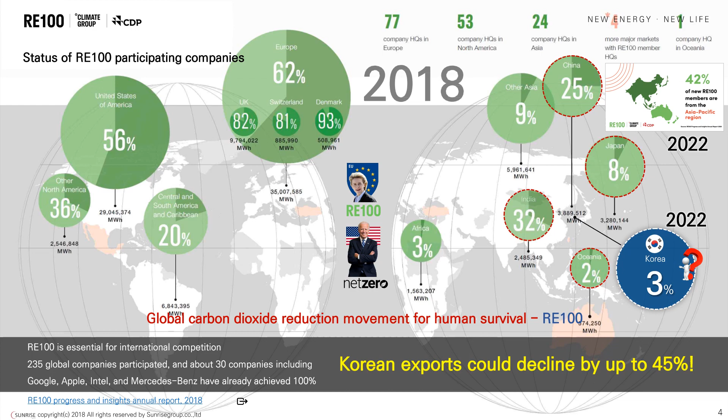Now, let's take a moment to look at hydrogen, a key energy transition keyword for RE100 implementation. Hydrogen is broadly classified into 4 categories: gray, blue, green, and white hydrogen.

Gray hydrogen emits carbon dioxide but produces hydrogen most easily and cheaply using natural gas. Blue hydrogen captures some of the carbon dioxide generated during the gray hydrogen production process and buries it underground or in the seabed.

Green hydrogen is produced by electrolysis of water using renewable energy such as solar or wind power, without carbon dioxide emissions. Lastly, there is white hydrogen, which produces a new type of energy or self-sustaining power without using renewable energy, electrolyzing water, or capturing hydrogen naturally existing underground.

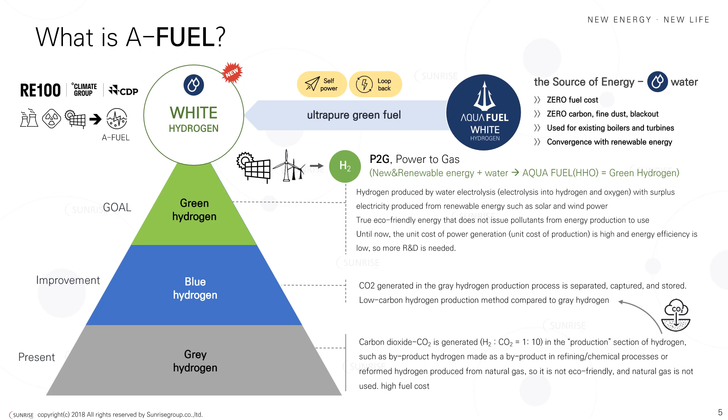Among these, green hydrogen and white hydrogen are internationally recognized as eco-friendly hydrogen. The fuel produced by our company is this white hydrogen. These two types of hydrogen have something in common: they produce hydrogen by electrolyzing water, without emitting carbon dioxide.

Changing fuel is the key to energy transition. Until now, mankind has used hydrocarbons, called fossil fuels. When burning hydrocarbons, that is, fossil fuels containing carbon, carbon dioxide is inevitably emitted. We need to change from hydrocarbons that emit carbon dioxide, a greenhouse gas, to carbon-free fuels.

One of the most carbon-free fuels is water. Water is hydrogen oxide with oxygen instead of carbon. Water becomes fuel when decomposed, and is the most ideal energy source as it is reduced back to water after use. Water is not only the most abundant resource on Earth, but is also an infinite and clean natural energy source with no fear of resource depletion, due to its property of being converted back to water after being used as fuel.

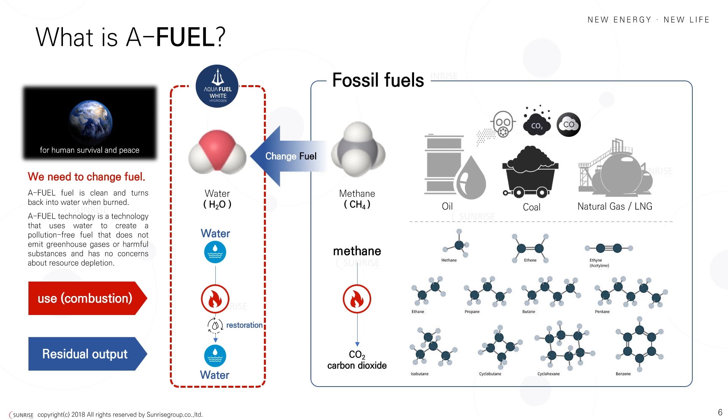However, because the cost of electricity to electrolyze water was high, people were reluctant to do so for economic reasons. Our company helps you make a quick and economical energy transition by providing solutions that minimize the electricity cost of electrolyzing water and the fuel conversion cost.

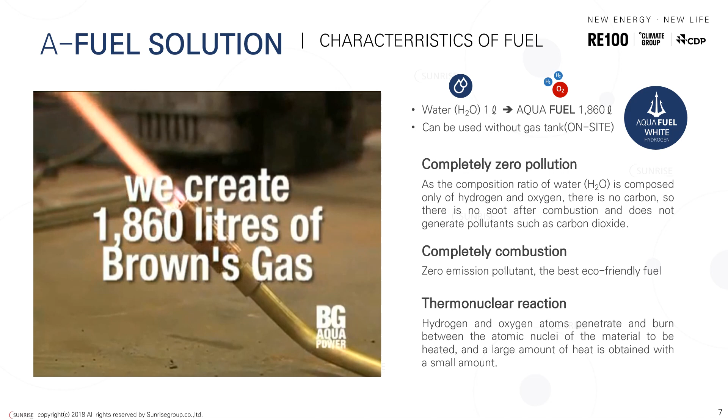Let's take a look at the A-fuel we produce. A-fuel is a simple and safe fuel that can produce approximately 1,860 liters of fuel from 1 liter of water, and does not require a separate storage tank, as it can be used immediately after production.

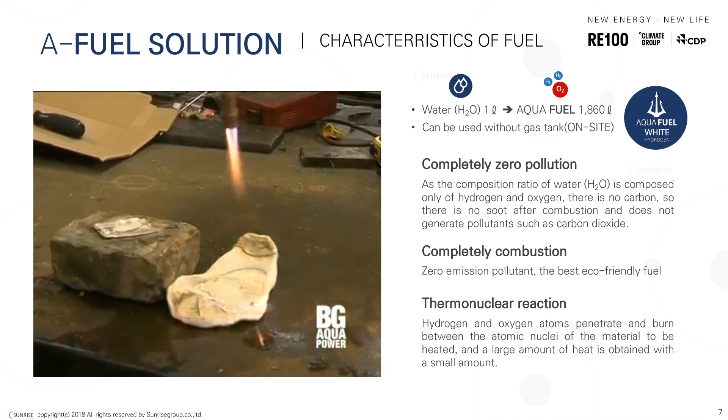Additionally, A-fuel is a pollution-free fuel. It is a fuel that burns completely without emitting carbon dioxide or any other pollutants, and can produce more calories than gasoline or LNG.

A-fuel is a gas fuel made by electrolyzing water without electricity costs, using our proprietary water treatment technology, self-generation technology, loopback technology that feeds back a portion of the produced power, and a new electrochemical reaction method. The A-fuel solution is a software and hardware integration technology that produces heat and electricity by directly using A-fuel in existing engines and boilers.

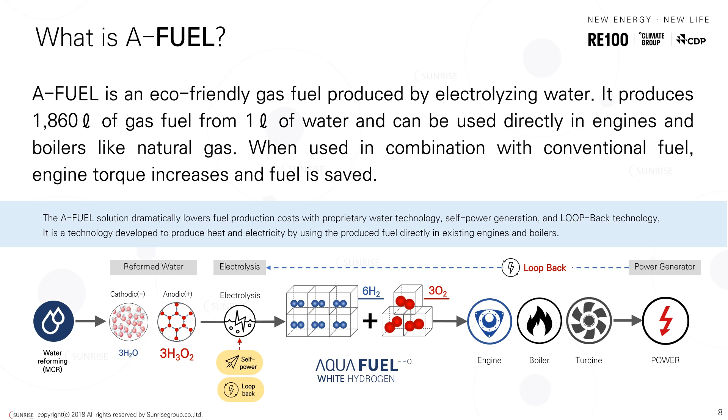A-fuel's electrolysis method, unlike the existing AEM, PEM, and alkaline methods, does not use a separation membrane, and is a differentiated electrolysis technology in terms of water pretreatment technology, reaction promotion technology, catalyst used, and electrochemical reaction formula. This is the most economical and efficient method.

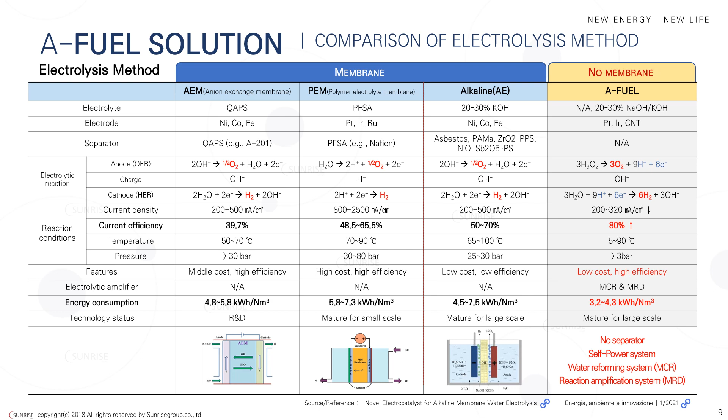A-fuel's electrolysis system can be applied to both seawater and freshwater, producing hydrogen in seawater and fuel in freshwater. Fuel produced from fresh water can be used directly in existing engines, boilers, or incinerators. In seawater, hydrogen is produced without oxygen generation. At this time, sodium hypochlorite, a powerful natural disinfectant harmless to animals, plants, and people, can be obtained as a byproduct. Hydrogen produced from seawater can be supplied by compressing, storing, or liquefying.

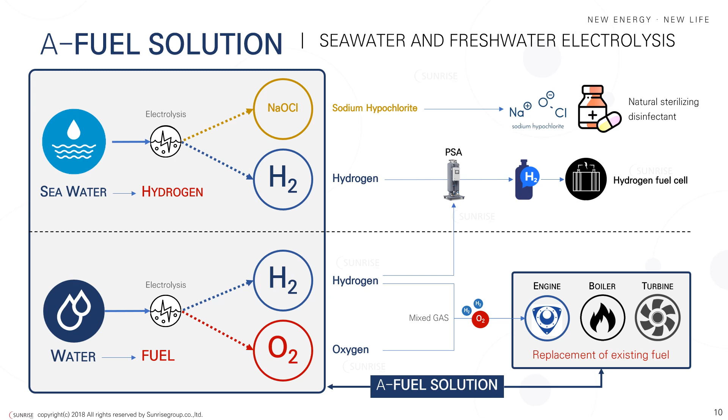A-fuel can be used for three main purposes. First, it can be used as an auxiliary fuel and alternative fuel to existing fossil fuels. Mixed combustion with existing fuel improves combustion efficiency, induces complete combustion, reduces fuel costs for internal combustion engines, boilers, and furnaces, and suppresses the generation of exhaust gases and pollutants.

Second, it can be used as fuel for engine power generation. A-fuel, which has the advantage of large explosive power, is directly exploded within the engine to increase the rotational power of the engine. This rotational power is used to generate electricity with a generator, and a part of the produced power can be returned and used as fuel production power. In this way, the cost of electricity consumed for fuel production can be reduced to zero, and most of the electricity produced can be supplied.

Third, it can be used as fuel for existing thermal power generation, that is, turbine power generation. More steam can be produced by combining existing fossil fuels, A-fuel, and steam. The steam produced in this way can be used to generate electricity using a turbine, and the used steam can be used again as mixed combustion fuel. It can be applied by co-firing A-fuel and steam little by little at first, then gradually increasing the amount. This method allows replacing fuel with A-fuel while still using the turbine of an existing thermal power plant.

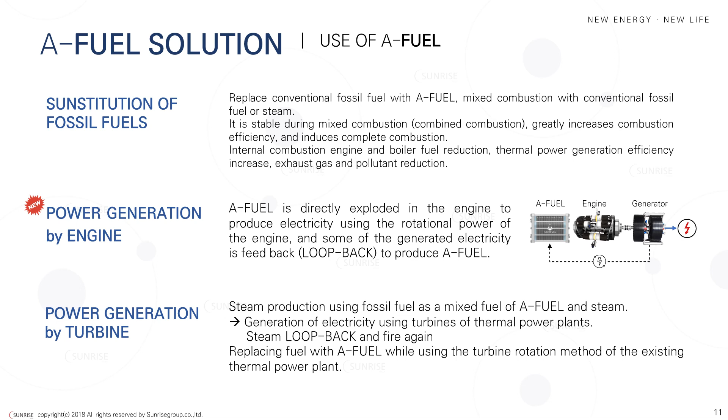The biggest feature of the A-fuel solution is hydrogen engine power generation. Hydrogen engine power generation using A-fuel is the most economical of the current renewable energy power generation systems, and is the optimal solution to achieve zero carbon because it uses water, an unlimited non-polluting raw material, and produces power in a non-polluting, eco-friendly manner.

A fuel power plant has an installation cost and construction period of about half that of existing hydrogen fuel cells, can supply power at all times without interruption, and can be installed anywhere indoors or outdoors, including islands, mountainous areas, underground facilities, and even mobile devices.

It can also be installed on trains and ships. A fuel power plant occupies an incomparably small area compared to other systems, can be stacked like a building, and above all, it is the most economical solution with fuel costs and environmental treatment costs close to zero after construction.

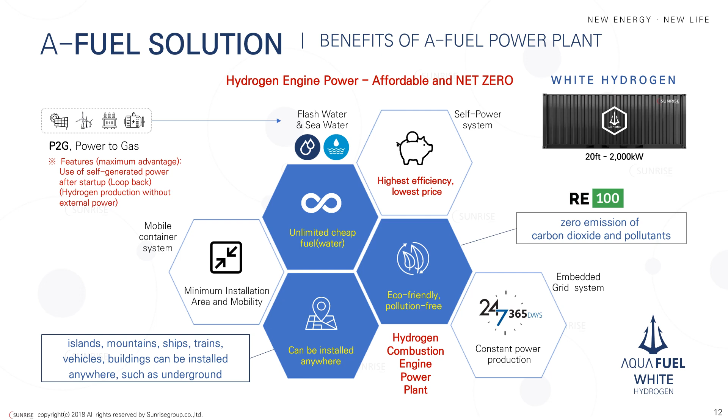A fuel power plant can build a smaller or larger power generation system based on 2 megawatts, and can build a power generation system as large as possible with the grid system. By building a grid system, we can supply flexible and stable power according to power demand.

A fuel solution has achieved the lowest fuel production cost. The production cost of 1 kilogram of hydrogen is approximately $2. This is because we have established a zero power cost production system by independently producing and procuring the power required for fuel production, which accounts for most of the fuel production cost. If a large-scale plant is built for mass production, hydrogen will be able to be produced at a production cost of less than $1.

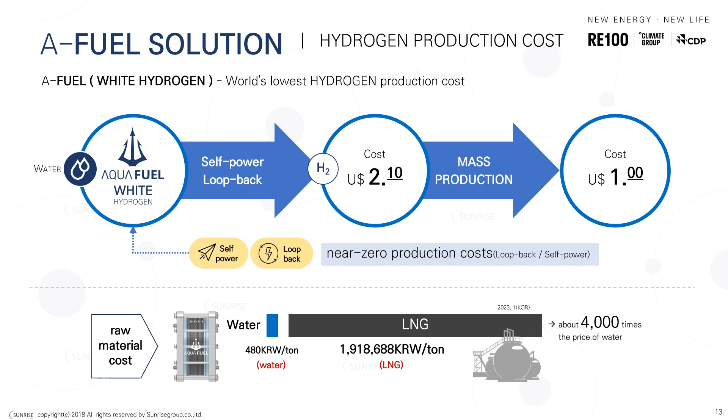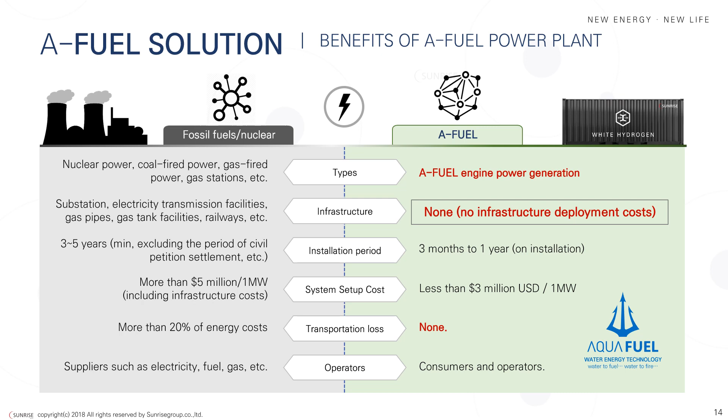A fuel power plant is a distributed self-generation system that can dramatically reduce social indirect costs and opportunity costs by eliminating the infrastructure construction period and additional costs required to build a power system. In addition, damage from power supply network problems such as power outages, power cuts, and power outages is greatly reduced, and the system can be operated autonomously according to the plans of consumers and solution operators.

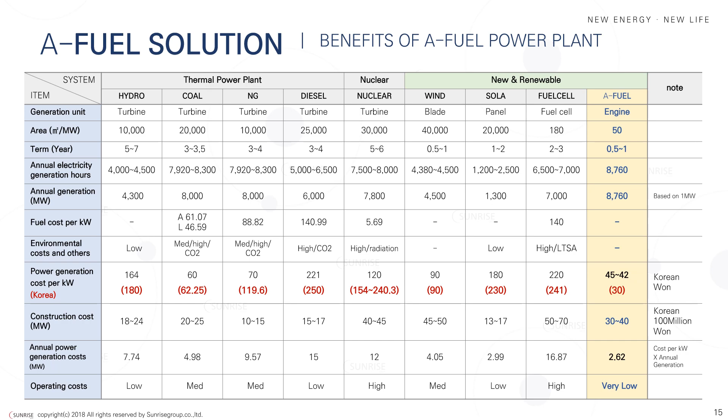With A-fuel solution, we supply land-based fuels and power generation systems using fresh water such as rivers, lakes, tap water, and groundwater.

We supply hydrogen production systems to hydrogen charging stations and embedded fuel production systems to transportation vehicles using A-fuel-compatible engines. The world's leading major global companies such as Toyota, Mazda, Porsche, Yamaha, Benz, and BMW are competing to produce or prepare vehicles equipped with hydrogen engines. The demand for hydrogen charging station infrastructure and embedded fuel production systems required by them and consumers will increase over time.

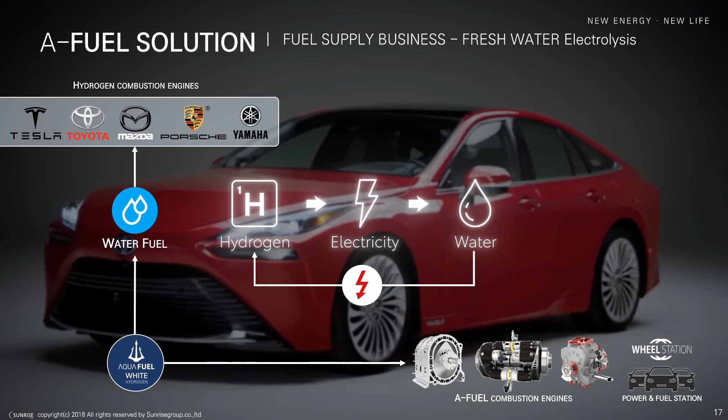Due to global water shortages, including in the Middle East and island countries where fresh water for drinking and living purposes is lacking, seawater desalination projects have become more necessary. We supply A-fuel solution that supplies the energy needed for seawater desalination projects and produces electricity and heat.

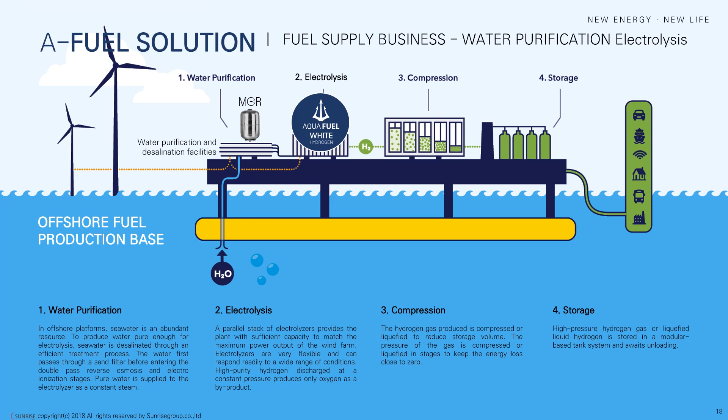We build seawater fuel conversion systems on existing abandoned drill ships, abandoned merchant ships, and barges on coasts and islands around the world to desalinate or turn seawater into fuel, and produce and supply fuel and hydrogen.

We build embedded fuel production systems on ships, allowing ships to produce and use the fuel they need using seawater. The supply of embedded fuel production systems for ships will be a groundbreaking turning point in enabling ships to achieve zero carbon and fuel costs.

We supply A-fuel solution to help build new cities and infrastructure, including empty coastal landfills around the world, offshore fuel bases and desalination plants on the coasts, food production bases, industrial complexes, and logistics complexes in the coastal inland.

A-fuel solution can be applied to various fields. In summary, it can be used in the same way as natural gas in all fields, including boilers, thermal power generation, and transportation that previously used natural gas.

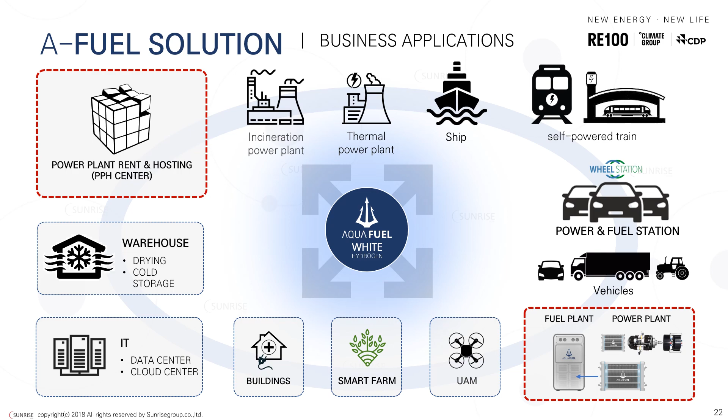Our company develops and services new business models using A-fuel solution. It is a power plant rental and power plant hosting business. Now, let's take a look at power plant rental and hosting services.

Power plant rental and hosting service is called PPH service, and is a service that can dramatically reduce power system construction costs, fuel costs, operating costs, management costs, labor costs, and installation space based on our proprietary fuel production and power generation technology. This service is a total service for leasing, operating, and managing power generation systems that can solve environmental problems and respond to RE100.

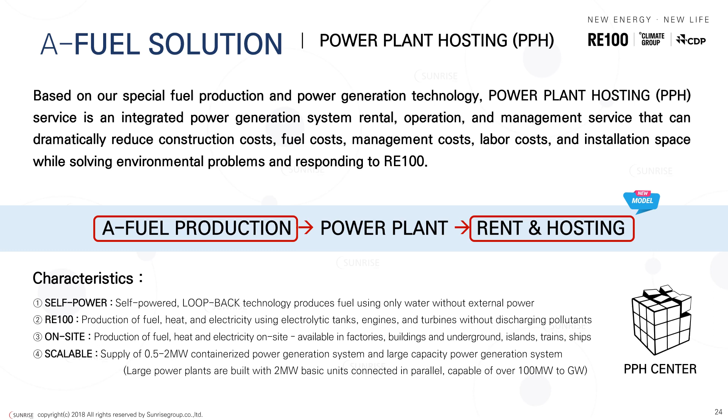PPH service is a new business model in the energy transition period and is provided mainly through centers in each region and base. PPH service rents plants at the village and city level, manufacturing and high-tech industrial complexes, logistics complexes including refrigeration and drying, and IT industrial complexes, including IDC and cloud centers, and provides operation and management services.

Companies will be able to conveniently and quickly obtain zero carbon and RE100 certification by simply using the PPH service without having to go through separate procedures and costs to obtain RE100 certification.

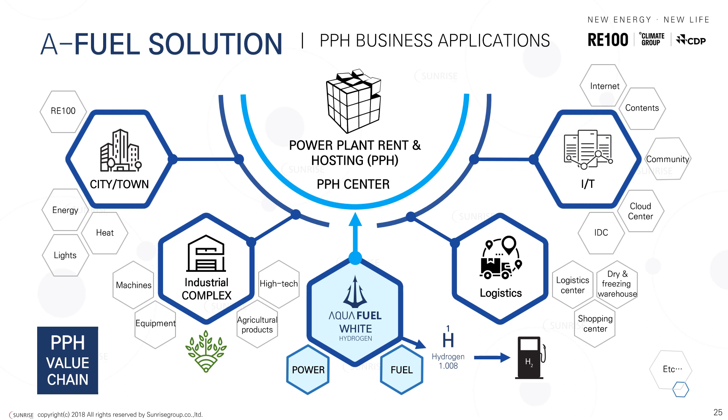PPH centers first provide services in industrial complexes and cities in each region. In data centers and cloud centers, PPH centers are established at each base to provide services. Data centers and cloud centers that use PPH services will be able to operate zero-carbon centers while reducing enormous power costs.

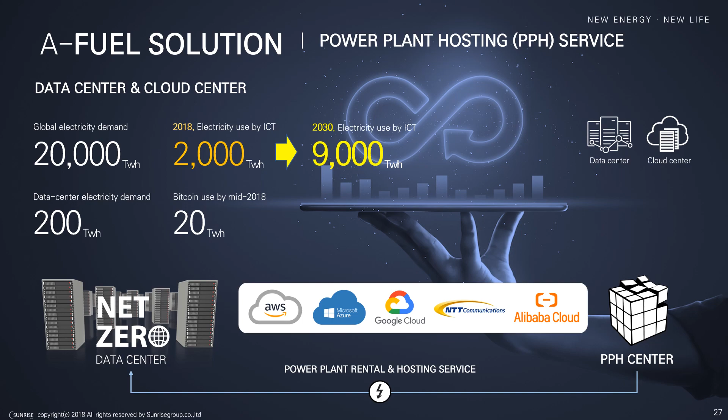As you can see in the picture, there are a lot of data centers and cloud centers around the world, and the number is expected to increase further. In particular, major groups such as Amazon, Microsoft, and Google have already declared RE100 and are leading the market, converting the rapidly increasing demand for data storage such as artificial intelligence, virtual reality, and video data into profits.

The reality is that existing renewable energy systems and other basic power systems cannot increase the supply of new and renewable energy to match the rapidly increasing data and power demand. In the future, the demand for PPH services for data centers and cloud centers to achieve zero carbon emissions and reduce power costs is expected to increase significantly.

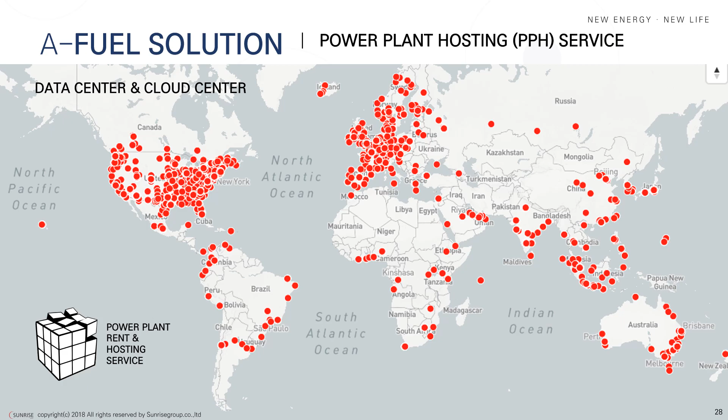The business we particularly want to do is railway PPH service. As long as we have tracks and trains, we can have clean, safe, energy-independent electric railways and railway infrastructure that can be used anywhere in the world, without needing power plants or electric lines.

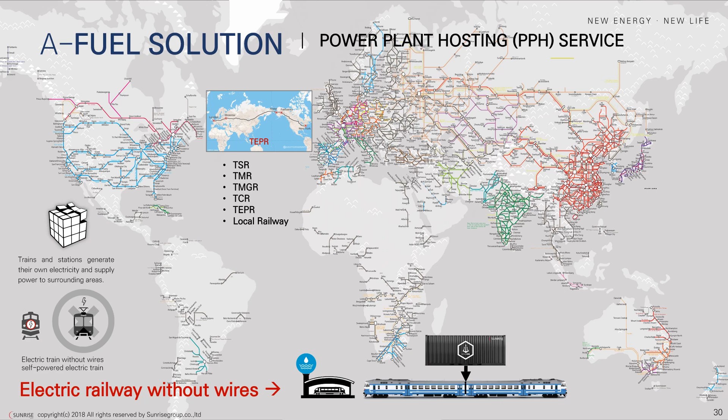The Railway PPH service is a project that enables trains without electric lines and supplies power and heat to cities and infrastructure around railway stations. This is the fastest and most economical way to industrialize a large area and achieve balanced regional development.

Now let's look at the technology. It might be a little difficult, but I will explain it as easily as possible. First, I will explain the fuel production system.

A-fuel water electrolysis technology is a technology that produces fuel through water pretreatment and a new water electrolysis system. The two biggest features of the A-fuel production system are water pretreatment technology and self-power supply technology.

Water consists of many water molecules coming together, like snowflakes, to form a cluster. The larger the cluster, the stronger the internal attraction, so a lot of energy is required to decompose. MCR is a technology that divides these clusters into very small sizes and changes them into a structure that is easy to electrolyze. Small clusters of water allow more fuel to be produced with less electricity.

We do not disclose or provide any information about this technology. Self-power supply technology consists of self-generation and loopback technology, and we will provide further explanation through additional materials.

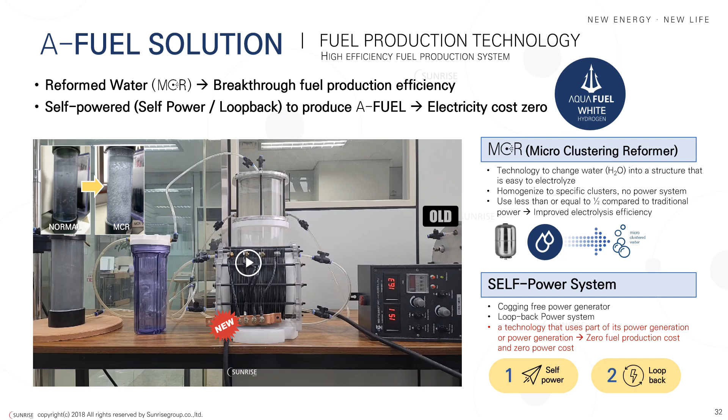If a self-power supply system is applied here, economic production efficiency is calculated to be infinite. We are constantly researching and developing new systems. This video shows the process of our continuous research and development.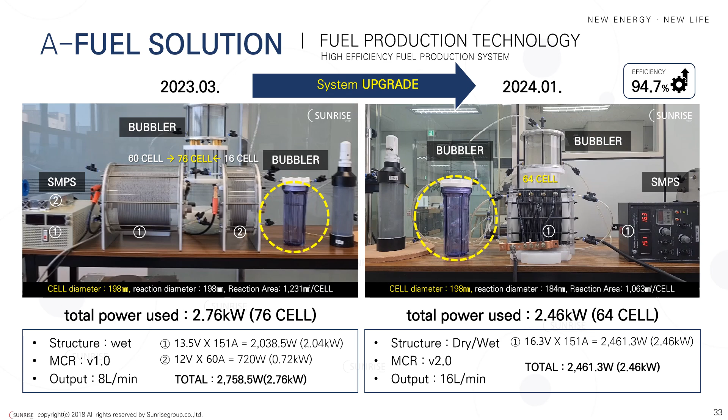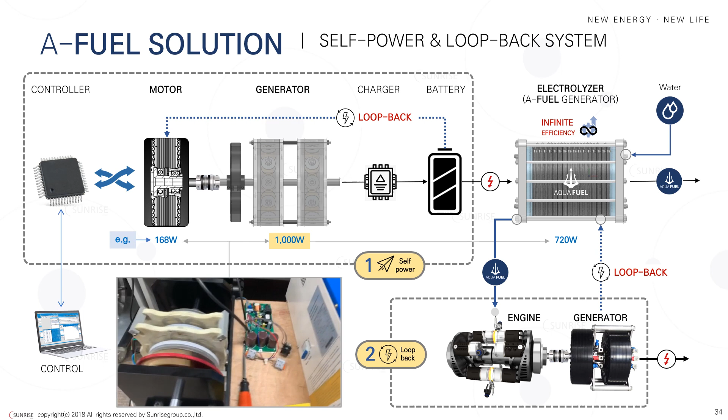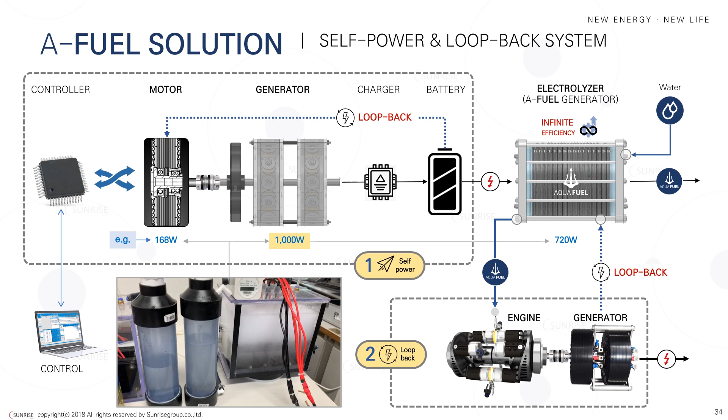These are the specifications of the A-Fuel standard electrolyzer. It uses a voltage of 36 volts, a current of 100 amps, and a power of 3.6 kilowatts.

It is a fusion of dry and wet electrolyzers with 4 cathode and 4 anode electrode cells each, a total of 64 electrode cells. This is a standard electrolyzer that produces 32 liters of fuel per minute, or 1,920 liters of fuel per hour.

The electrolytic efficiency target for this electrolyzer is approximately 95%. By organizing this electrolyzer into one system, we create a fuel production plant that produces fuel equivalent to 1 kilogram of hydrogen per hour, that is, 9 kilograms of A-fuel per hour.

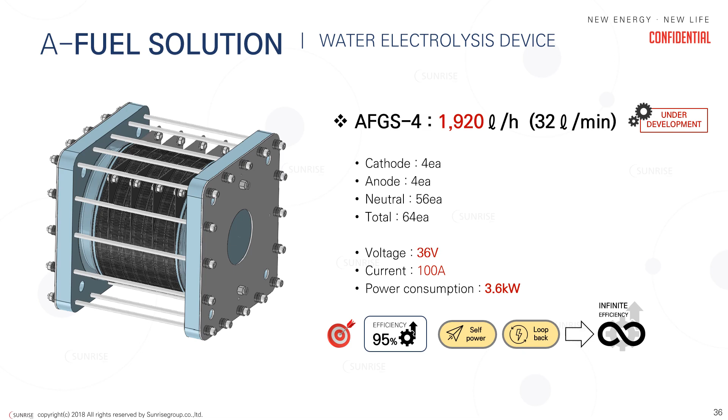As we know, water does not exist in only 3 forms: solid, liquid, and gas, ice, water, and water vapor. It has been discovered that surface water, a different form of water, is instantaneously created at the interface between water and other substances. The fourth type of water, surface water, is anodic and has been found to be a semi-liquid state with properties of both ice and water.

We demonstrated through the polarity arrangement process that such surface water and general water participate in electrolysis in the anode and cathode electrode cells, respectively, and developed our own electrolysis technology using that principle.

Reorganizing water into very small clusters with MCR increases the amount of surface water at the interface between water and electrodes, increasing the amount of charge and energy, thereby improving electrolysis efficiency.

You've all learned in school, in middle school, that water has 3 phases: solid ice, liquid, and vapor. Well, we uncovered a 4th phase of water. It turns out that there are unexpected applications to this.

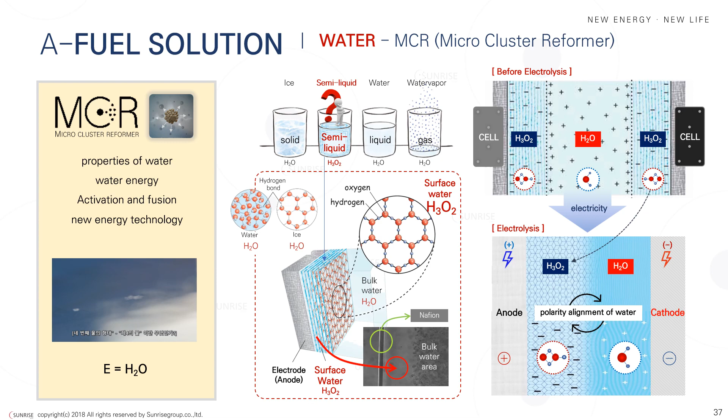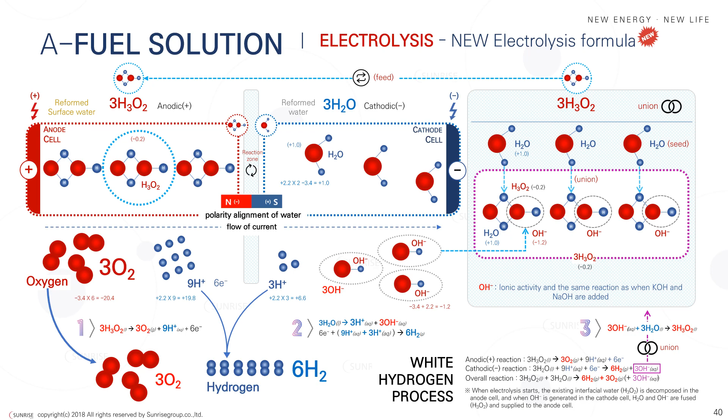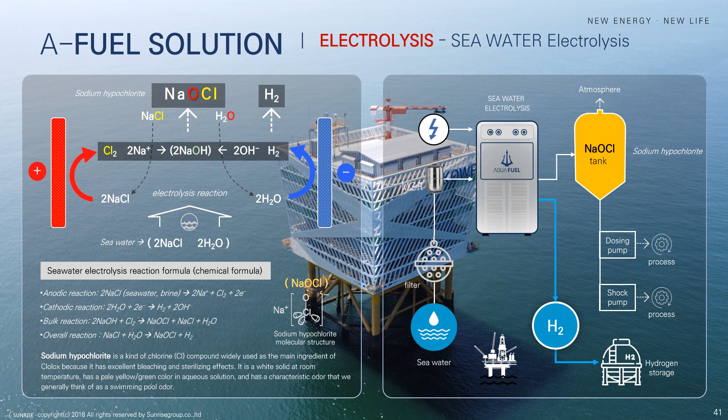A-Fuel system can also electrolyze seawater. Only hydrogen, without oxygen, can be produced from seawater. The reason we are focusing on seawater electrolysis is because mass production of hydrogen will be necessary in the future, and it is difficult to supply the large amount of water needed using only fresh water from land, since climate change will gradually lead to water shortages. This problem can be solved by using seawater.

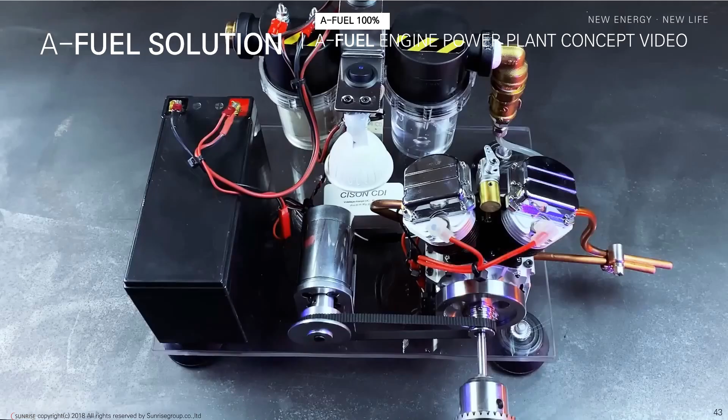Now let's take a look at the pollution-free, high-efficiency power generation system that uses the explosive power of A-fuel and the rotational power of the engine. This video is a concept video showing a model of the engine power generation system using a small engine and generator. At first, power is supplied from the battery and water electrolysis begins.

Next, electricity supplied from the battery is used to electrolyze water, and fuel is produced from water. The produced fuel is supplied to the engine. The engine explodes the supplied fuel within the cylinder and rotates the central axis of the engine. By connecting the central axis of the engine and generator, when the engine rotates, the generator also rotates.

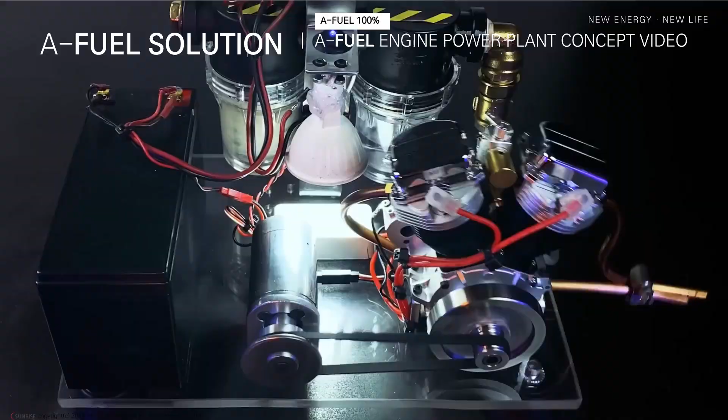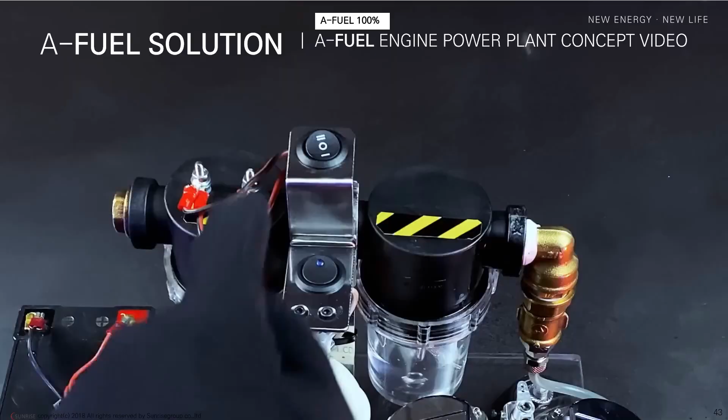The generator produces electricity, and the generated power is charged to the battery. While charging the battery, the remaining electricity turns on the light bulb. To produce fuel and supply it to the engine, the water electrolysis tank receives the electricity charged in the battery and produces fuel with water. By continuing to repeat this process, the circular cycle of supplying power, producing fuel, supplying fuel, operating the engine, rotating the generator, producing power, recharging the battery, and supplying excess power to the outside continues to repeat. This circulation process is the basic concept of the A-fuel engine power generation system.

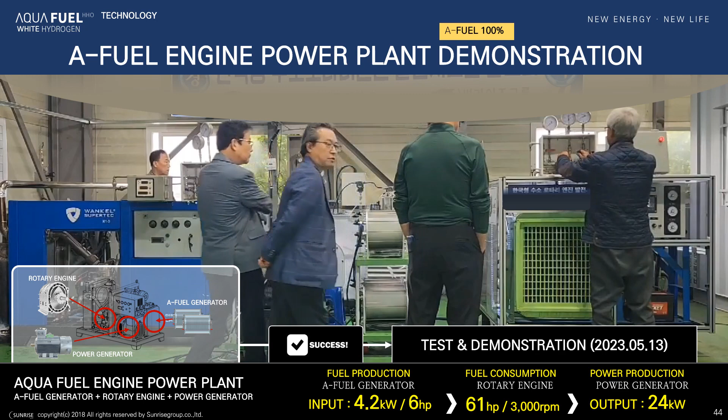This video shows a large engine and large generator operating on the same concept as the concept video we saw just before. It shows how A-fuel is produced with a power of approximately 4.2 kilowatts and 6 horsepower, rotating a 61 horsepower, 45 kilowatt engine at 3000 RPM, and connecting a 24 kilowatt output generator to this engine. What is important here is that the A-fuel was produced by supplying 4.2 kilowatts of power to rotate the 61 horsepower, 45 kilowatt engine at 3000 RPM. More details will be explained in the next slide.

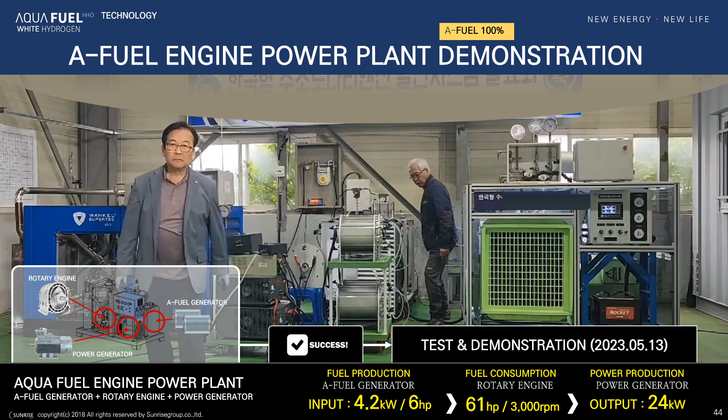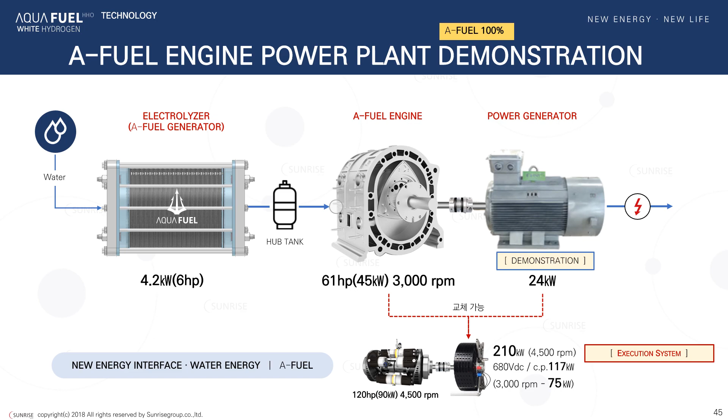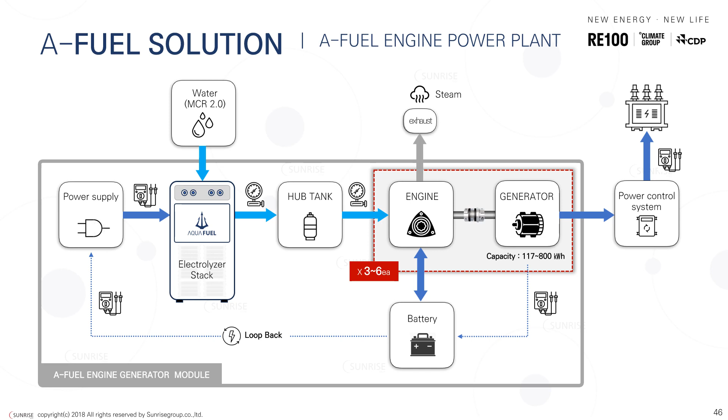We are showing the configuration of the A-fuel engine power generation system. It has the same structure as the system in the video you saw earlier. This configuration shows the configuration of one module. The power plant is equipped with 3 to 6 engine generator sets.

A-fuel power plant has an engine power generation system as standard. It can be used not only as an installed type, but also as a mobile and vehicle-mounted container generator. A-fuel power plant has a built-in fuel production and supply system, which includes an electrolyzer system that electrolyzes water, MCR, a water pretreatment device, and MRD, an electrolysis accelerator. It also has a built-in loopback system and power supply system to produce fuel using its own power.

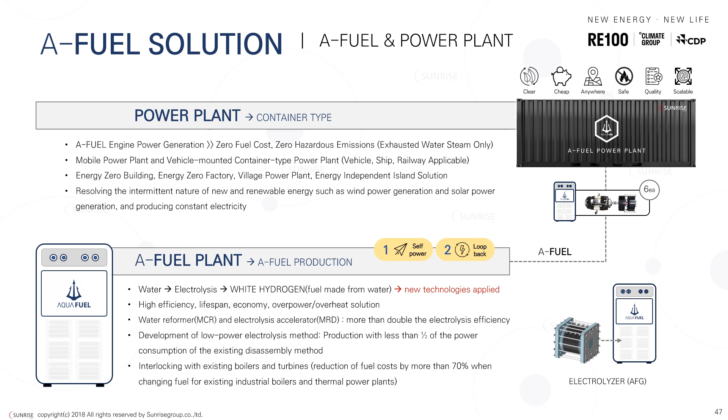A-fuel power plant is a container-type plant and has 1 megawatt, 2 megawatt, and 4 megawatt systems. The standard model has a 2 megawatt power generation system built into a 20 feet container. The 4 megawatt plant is a 4 megawatt power generation system built inside a 40 feet container. The basic structure of the 4 megawatt plant is an A-fuel production plant and 10 sets of engine generator modules. The basic structure of the 2 megawatt plant is an A-fuel production plant and 6 sets of engine generator modules. Systems below 1 megawatt are based on an A-fuel production plant and 3 sets of engine generator modules.

A-fuel production plant is a gas production and supply module using a water electrolysis system. The 4 megawatt power plant consists of 10 sets of standard model A-fuel generators. There are 6 sets for systems under 2 megawatts, and 4 sets for systems under 1 megawatt. In large plants of 10 megawatts or more, the A-fuel production plant and engine power generation system are separated, and each plant is constructed to build the site.

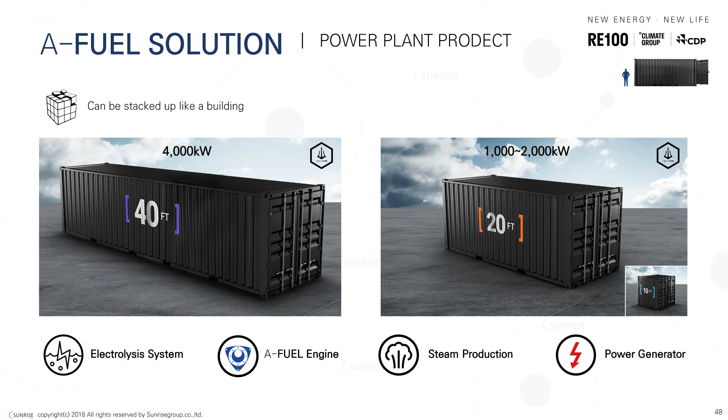Let's take a brief look at the configuration of the 2 megawatt A-fuel engine power generation system.

The 2 megawatt plant, supplied in a 20-foot container system, has a maximum output of 4,800 kilowatts, a rated output of 2,100 kilowatts, and an output voltage of 380 volts 3-phase. The output voltage can be adjusted to 440 volts, 680 volts, etc. upon request.

Inside the 2 megawatt standard power plant, 1 A-fuel plant and 6 engine power generation system modules are built in. Of the 6 modules, 5 are operating and 1 unit is on standby for rotational operation.

Modules that fail during operation are immediately replaced by modules waiting for rotation, and the failed modules are repaired or replaced. Of the rated output of 2,100 kilowatts, 100 kilowatts are looped back for fuel production and internal system operation, and 2,000 kilowatts are output.

When temporary peak power is needed, it can be output by either operating additional standby modules or increasing the generator output by increasing the engine rotation speed. A 2,000 kilowatt power plant can output peak power of up to 4,000 kilowatts.

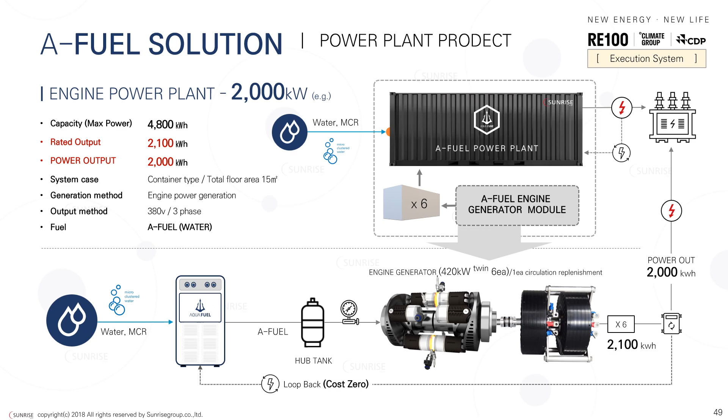The A-fuel engine power generation system supplies fuel produced by electrolyzing water in an A-fuel generator, that is, an electrolyzer, to the engine, and the engine combusts and explodes the supplied A-fuel within the cylinder to rotate the engine's rotation shaft. When the engine rotates, the generator connected to the shaft rotates with it to produce and output power. In an engine power generation system, the engine plays the role of a motor or turbine rotating a generator in a typical power generation system.

The embedded generator built into the engine produces less than about 5 kilowatts of electricity needed for fuel production and supplies it to the electrolyzer through a loop back, allowing the electrolyzer to continuously produce fuel and supply it to the engine. By continuously repeating this process, power is continuously produced and supplied without electricity or fuel costs.

A-fuel increases the torque and RPM of the engine and amplifies its rotational power with a faster combustion speed and greater explosive power than existing fossil fuels. The A-fuel engine power generation system is constructed using these A-fuel characteristics and A-fuel compatible engines.

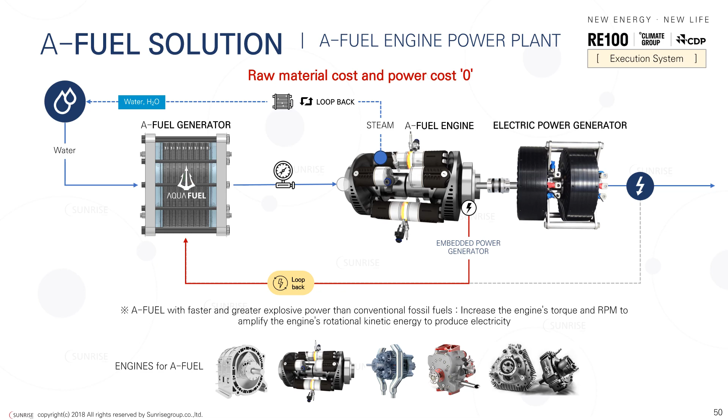Let's take a look at the mixed combustion system of A-fuel and existing fossil fuels to save fuel and reduce pollutant emissions.

A-fuel can be used by mixing with existing fossil fuels in almost all internal combustion engines, boilers, heating furnaces, and incinerators that use existing fossil fuels. The easiest way to mix is to combine A-fuel with air when supplying the air needed for combustion.

In systems of a certain scale or large plants, an additional mixing and dispersion pump is installed to mix A-fuel and existing fuel in advance, and the mixture is supplied directly to the combustor or internal combustion engine.

When mixing A-fuel and existing fuel, fuel can be saved, and since A-fuel acts as a high-temperature kindling, it prevents delayed combustion of fuel, increases combustion efficiency, and suppresses the generation of pollutant substances.

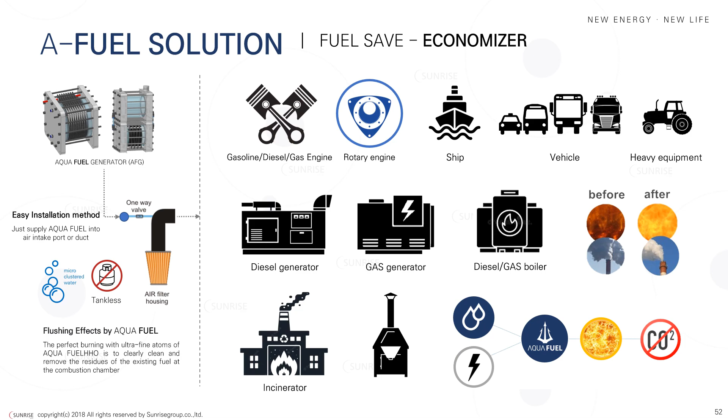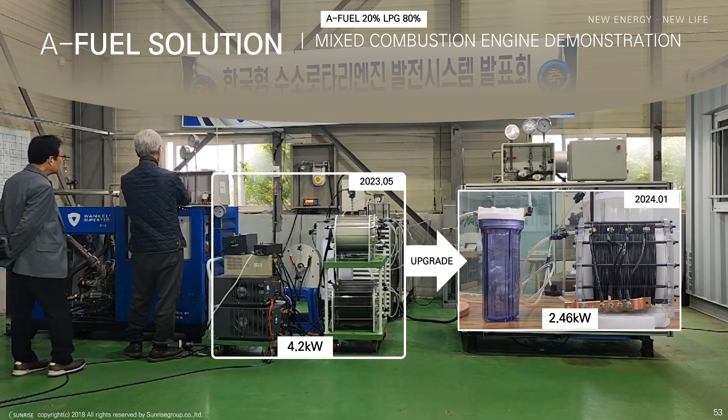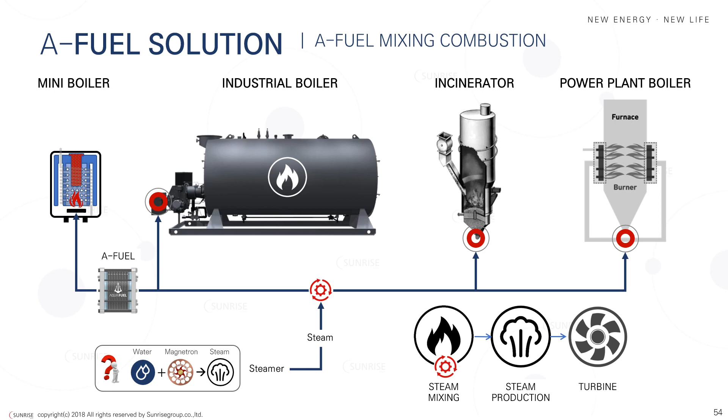This configuration consists of a system that produces mixed fuel from existing fuel, A-fuel, and steam using a fuel mixing pump and supplies it to the boiler.

The steam generated from the steam generator, which is a boiler for power generation, is sent to the turbine, and some of the steam discharged before or after the turbine uses is looped back to the fuel mixing pump and used to produce mixed fuel.